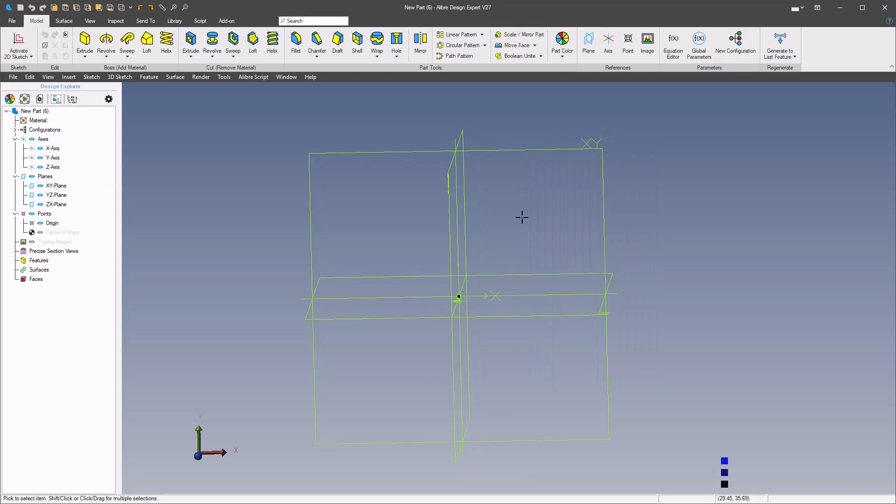We'll get started on the XY plane, and I'm going to start this with a rectangle and come off the origin, and I'll key in the values here of 21.5 for the width, and the height is 65.

And then I'm going to include... put a radius on here, but I'm going to do a revolve for these first two sections or parts for the inner and outer ring. So I'm also going to include a line.

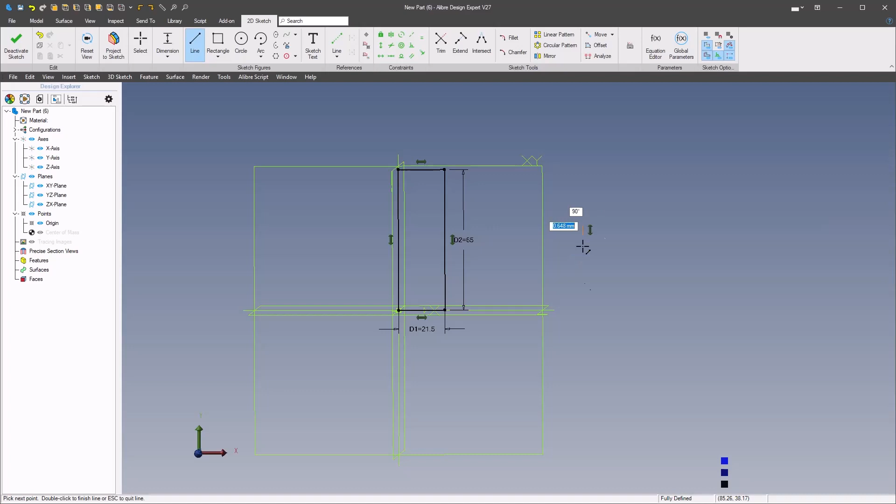For the outer ring, so we'll make that even on the bottom, and that outer ring is 40 high, and I'm going to dimension this to the inside radius of 112 divided by 2, and I'll demonstrate why that's the case in a moment here with the thin revolve.

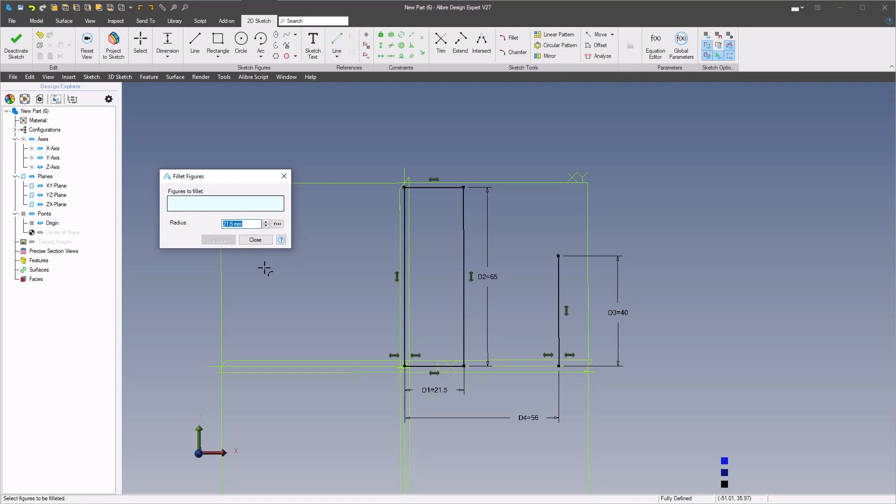Next I'm going to come up here and grab my fillet tool, and I'm going to do this at 21.5 for the outer radius of the center. So I'm going to grab these two lines and okay that. So now I've got my radius in here, and now these two lines, I'll change them to reference figures.

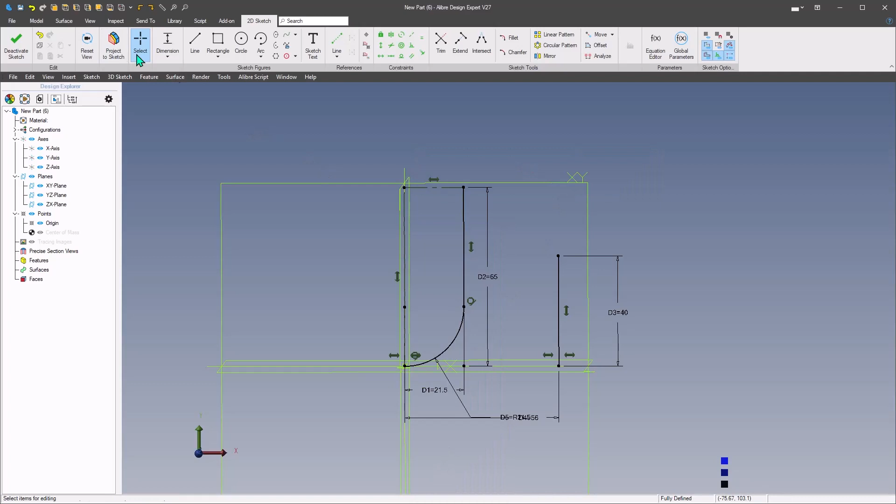And now I'm going to go up in my model ribbon, go to my revolve, click on the drop down and select thin revolve, select my axis, and then key in my thickness here at 4 millimeters.

Now if you notice something, this grew the material thickness to the inside of the sketch line. So if I hit OK here and click on the outside...

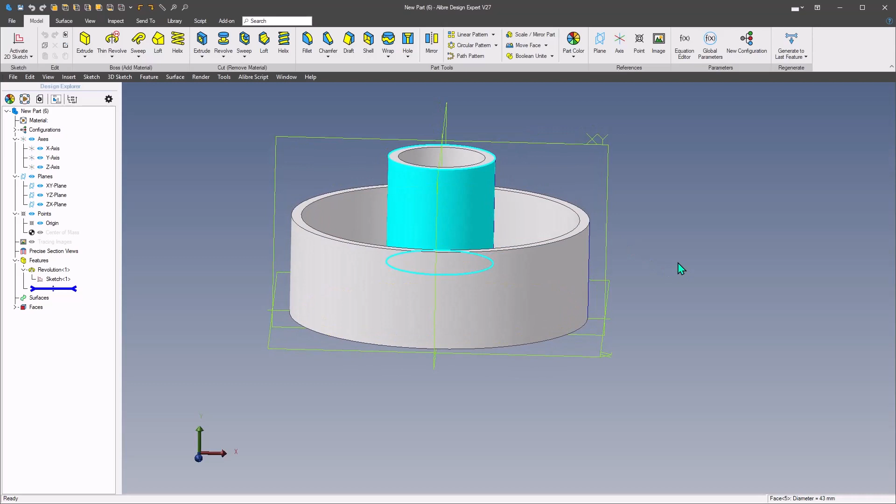So sometimes what happens with a thin revolve is that the thickness will grow on opposite sides of your two sketches if they're detached sketches like I have here, and sometimes you have to double check your dimensions on your part to make sure you got it going in the right direction, then adjust your sketch.

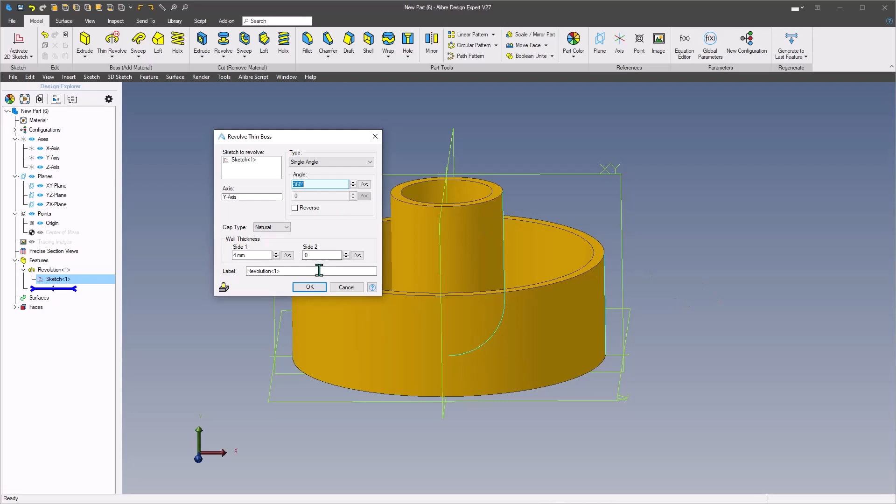So with that said, now the next thing I'm going to do is make those cuts on the center portion, and looking at the top view there, it looks like it's cutting off going right to left, so I'll rotate here, and I'm going to start a sketch on this YZ plane.

So draw another rectangle, and here I'm going to make this even with the origin, and from the origin the total width is 25, so I'm going to do 12.5 for the width, and then the height is going to be 30 from the top, so I'll dimension 30 from the top of the center.

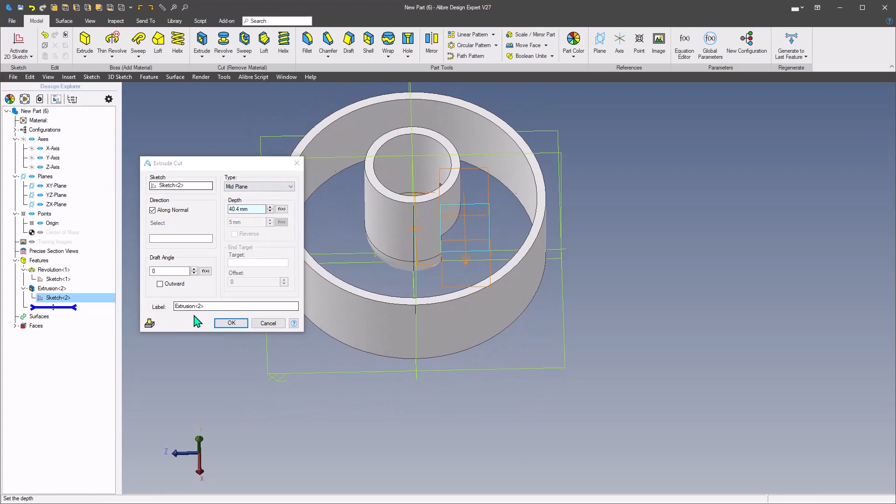And now I'll do an extrude cut, and I'll do a mid plane, and I'll just drag this out so that it's cutting through the whole part.

And then I'll mirror that. So find my mirror, grab the feature, and then mirror that. Okay, so now I've got that cut.

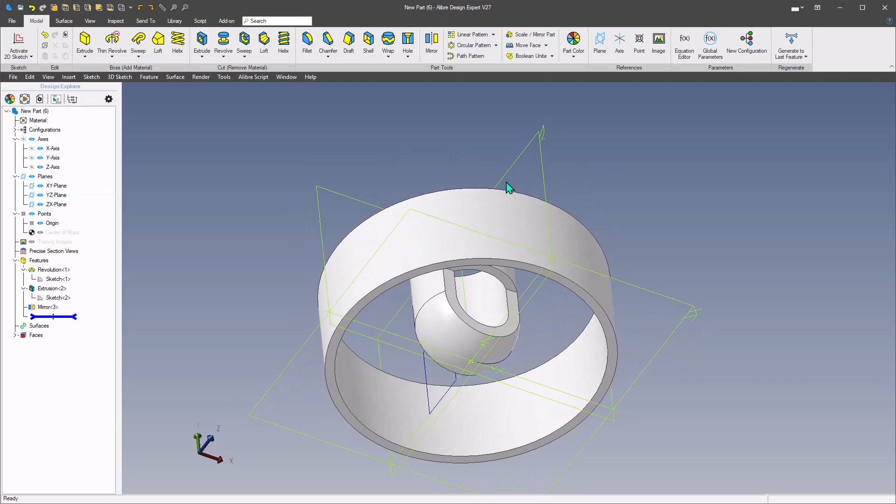So now that's reflective of the top view except for the fins. So if we take a look at our top view, our cut is going left to right. And now we can go ahead and start our fins. I'm going to start the fins on the same plane as the cut so that I can get it on the line of symmetry.

So first thing I'm going to do is right click on here and insert a precise section view, and hit reverse so I get a view that I'm looking into it.

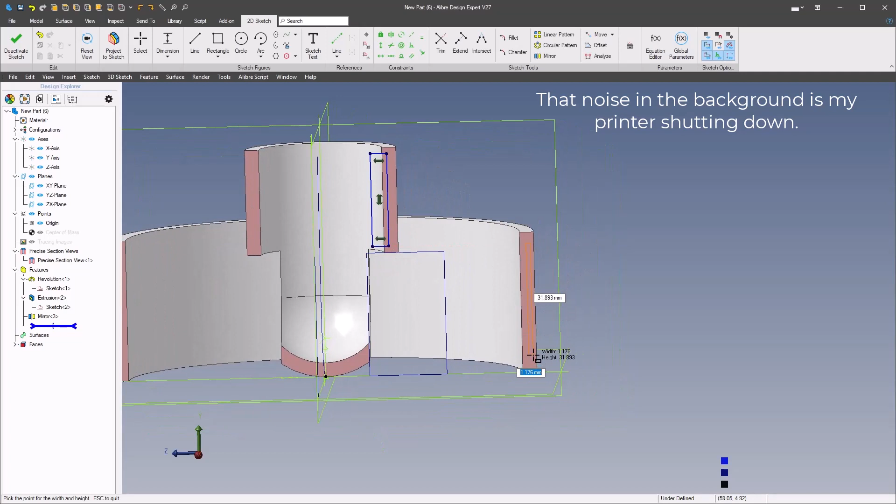So now here I'm going to draw in my fins. I'll start a sketch on the YZ. The first thing I'm going to do is put in a couple of rectangles, one over here and one over here, and those I'm going to connect with lines for the top and bottom of the fin - one on the top and one on the bottom.

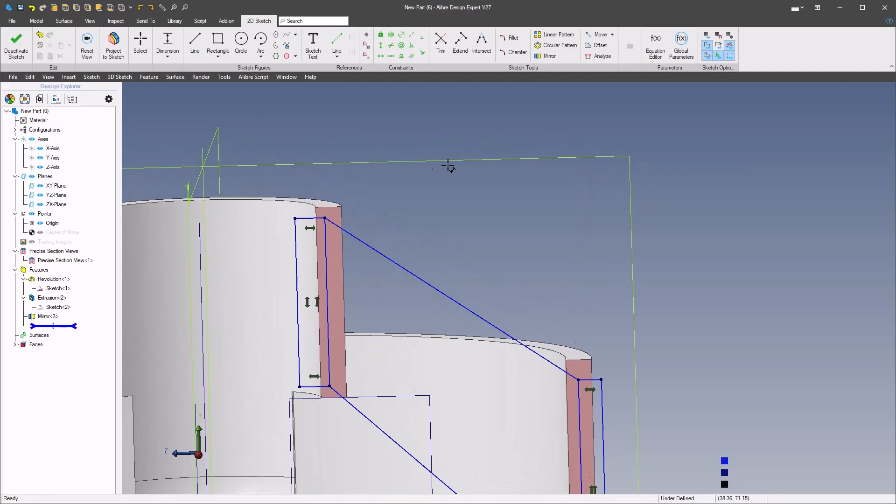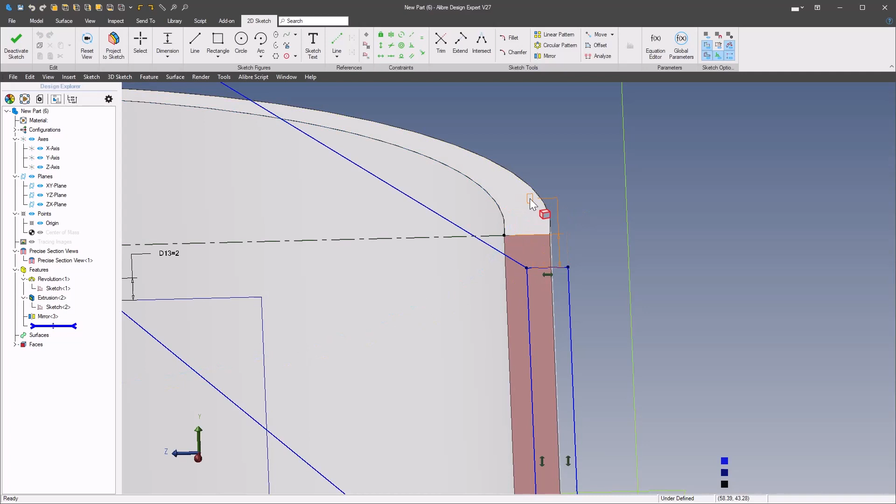Okay, and now I'm going to dimension from this point to there, and that's going to be 2 millimeters. Then from this line to the bottom line, 2 millimeters, and again on this side to the inside, 2 millimeters, and on the bottom to the inside bottom, 2 millimeters.

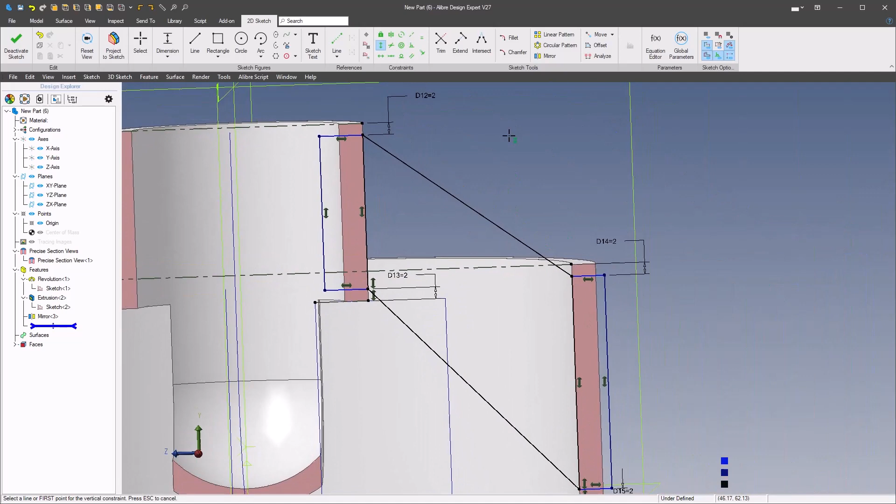Now I'm going to align these endpoints to the reference points that were projected on, and then this one it'll be onto the outside one, vertical. So now the next thing I'm going to do is select these inner lines and convert those to reference geometry.

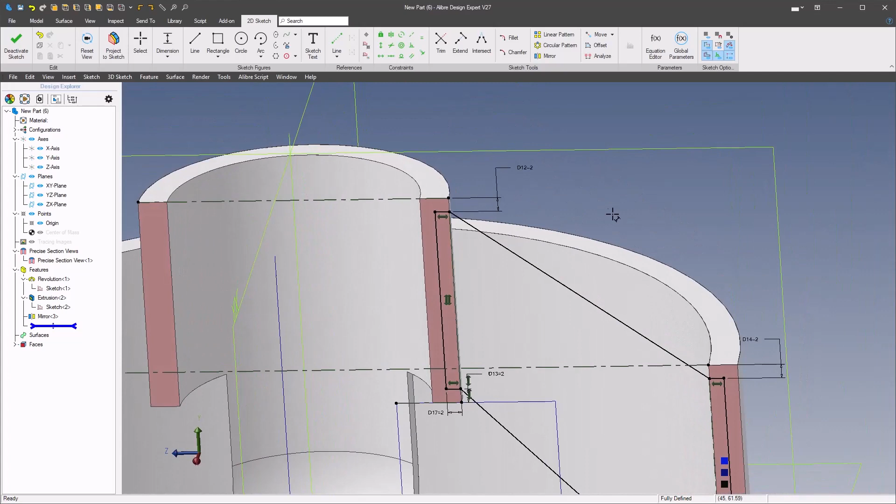And now these outside parts of the rectangles, I'm going to dimension those at 2 so that they end up inside the body of the part. The reason you want to go inside the body is because if you just extrude this to the width, it's going to leave a gap between the end of your fin and the concave of the part. On this inner part, it's going to be more evident than on the outer one, because here it's going to go into the part; here it's going to be pulling away from the part.

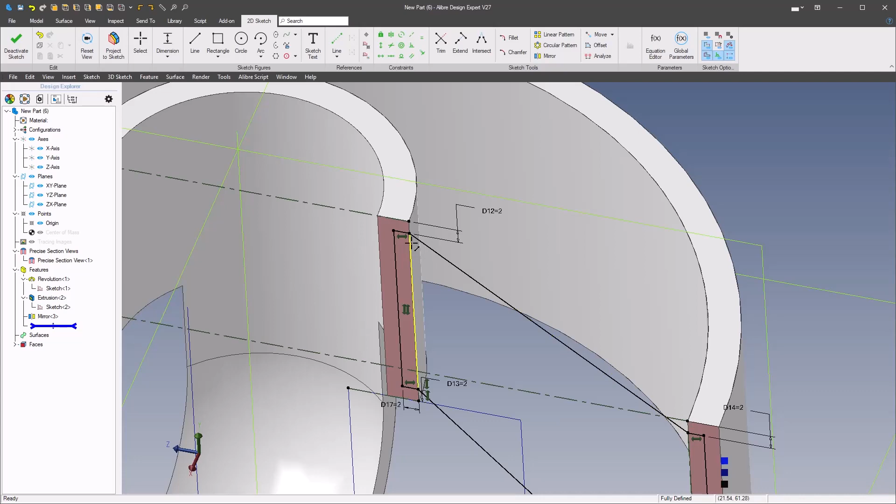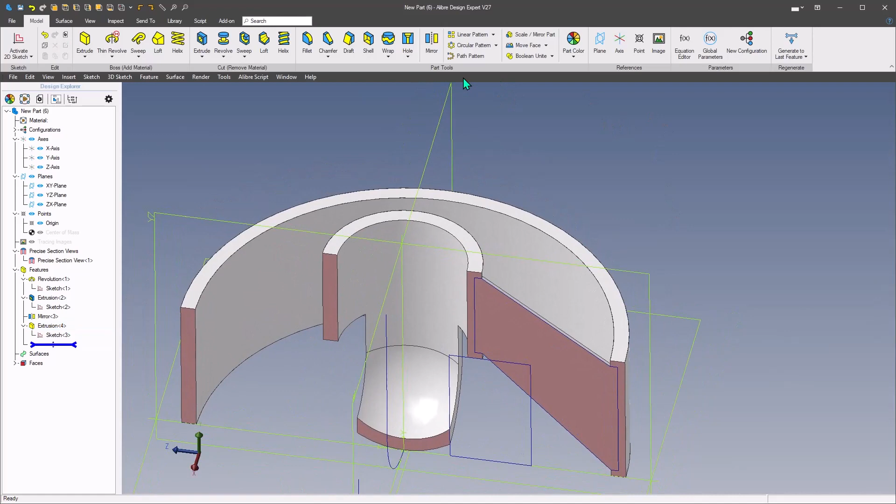So now I can go in and do an extrude, go mid-plane, and the fins are 2 millimeters thick, so I'll do a mid-plane 2 millimeters and hit OK. Then the last thing it's going to do is a circular pattern, and there's 8 of them. Then we turn off our views, and there's your part.

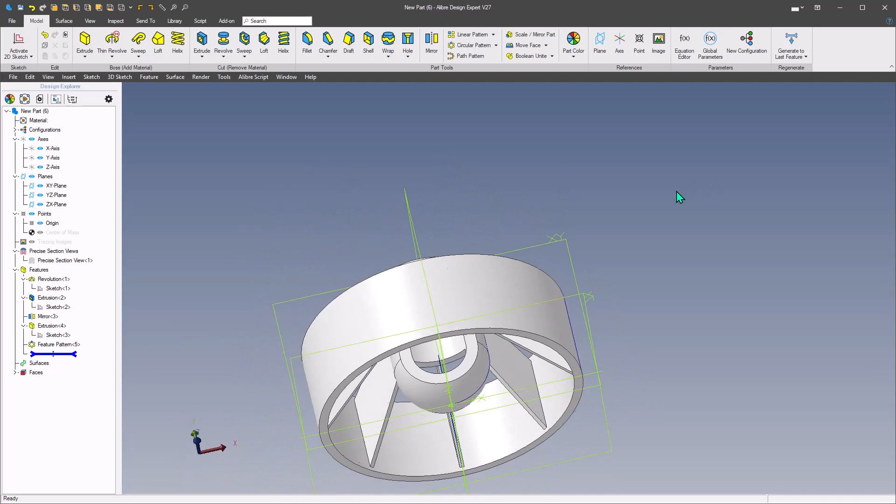So the last thing you do here now is going to be material. So we see we got to add ABS material, and let's check our physical properties, and we have 101 on there, and I believe that was what the mass of this part was.

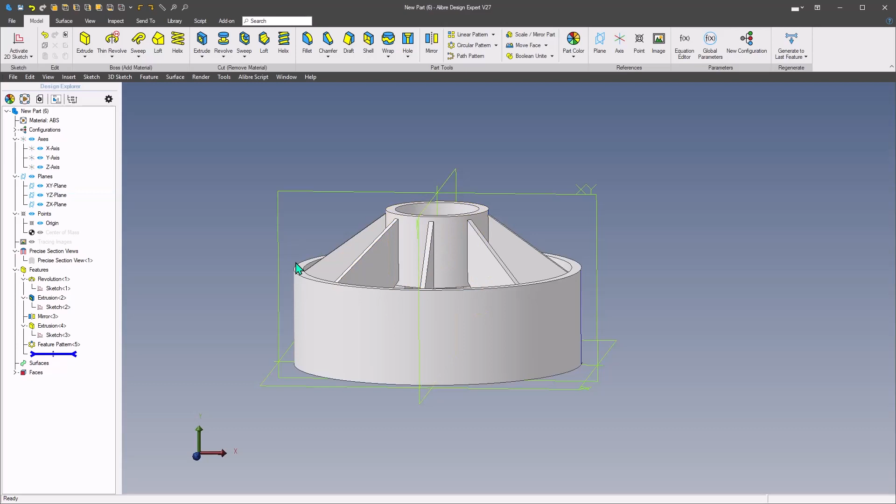So that's how you would do it in Alibre using the thin revolve. So the fins are going to be the same process, but let me just back up here a little bit.

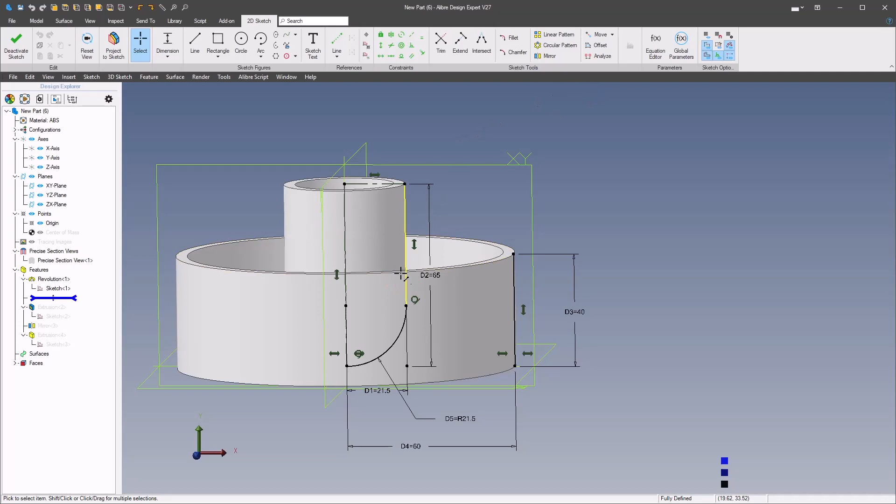Get up here to this revolve, and I'm going to edit this. Actually, I'm going to end up deleting that revolve, but if you don't have thin extrude or any of the thin features, the thing you do is you create this profile and then use your offset.

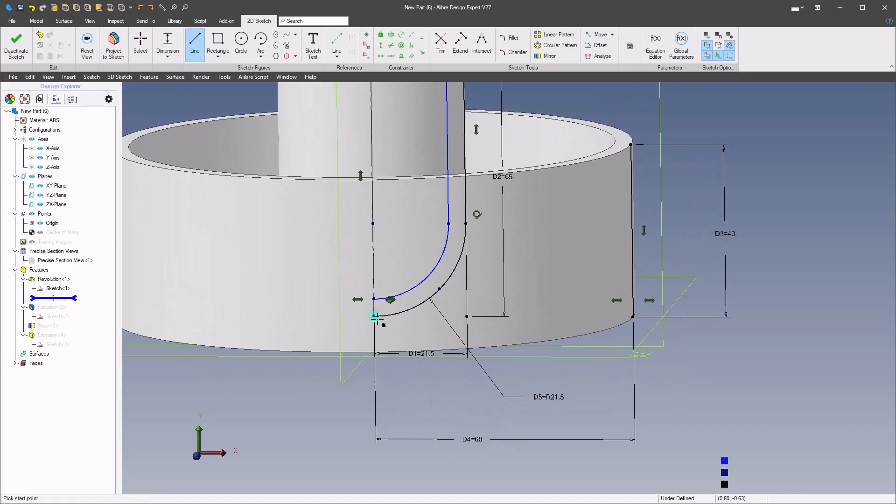And we're going to offset some lines here at 4 millimeters. So we'll grab this line and this line and okay that. Then let's put some lines on here to cap these features - draw a short line there and a short line here.

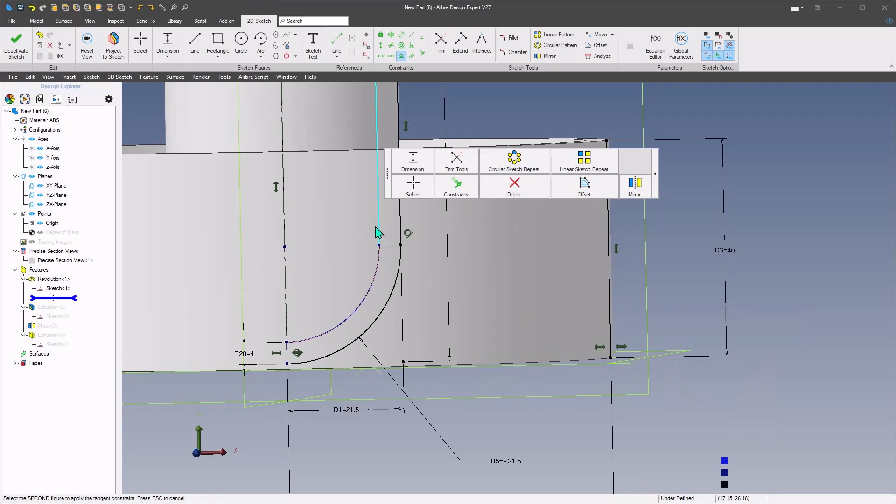And if you want, you can throw a dimension on here too at 4, just to fully constrain that. And we'll throw a constraint - let's see, maybe tangent will work here. Nope, it's not going to like that.

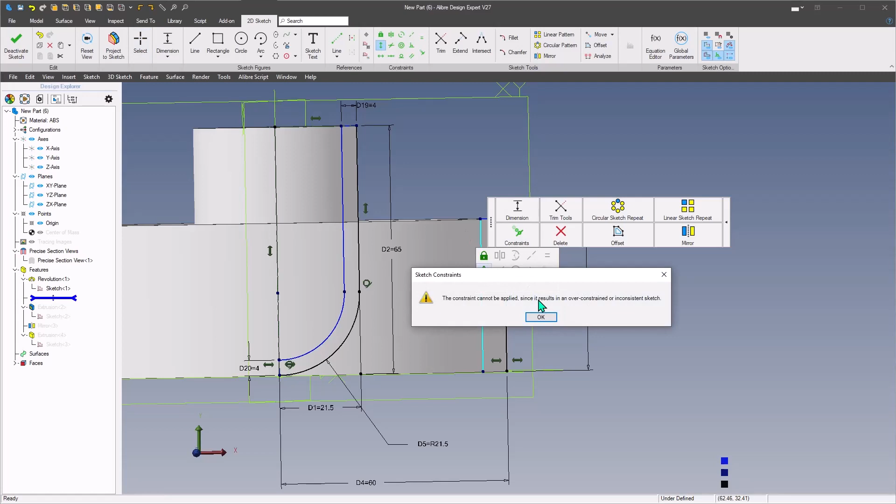Okay, and then on this side, get my line and finish this off. So this is going to be vertical. Let me see if I get a horizontal here. Now it's going to start doing this business of being over constrained.

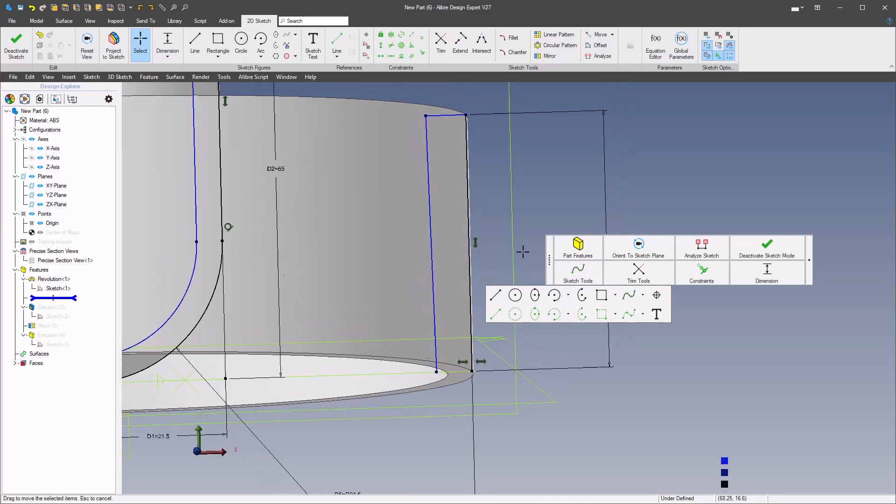So let me do this here. We'll just get rid of that, and we'll just do a rectangle here. And here it's going to be 4 millimeters thick and 40 high. Then we'll dimension this from the center at 60.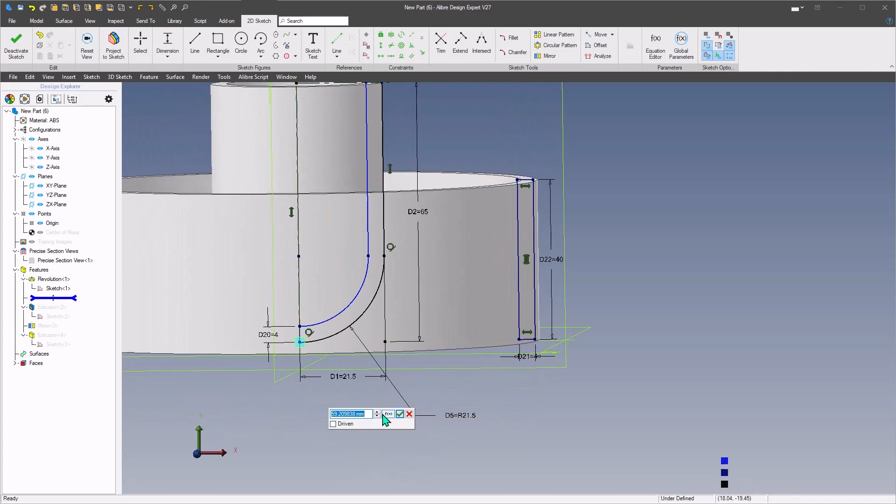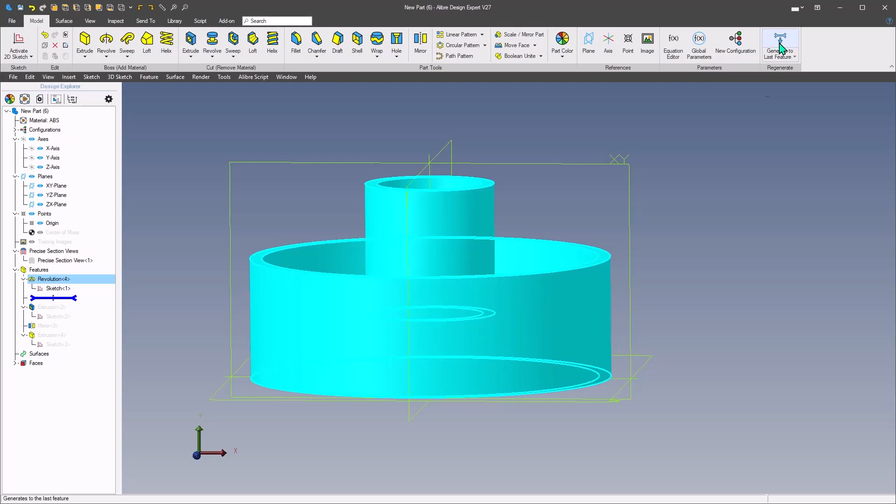And then get out of the sketch, and we'll delete the thin revolve, and we'll just do a standard revolve. Grab our sketch, get our axis, and okay that. Then the rest of it's the same as using, creating the fins and everything else in here.

So anyway, it's kind of a kludgy looking video, but that's how I would attack doing this part. So hope this helps you out.